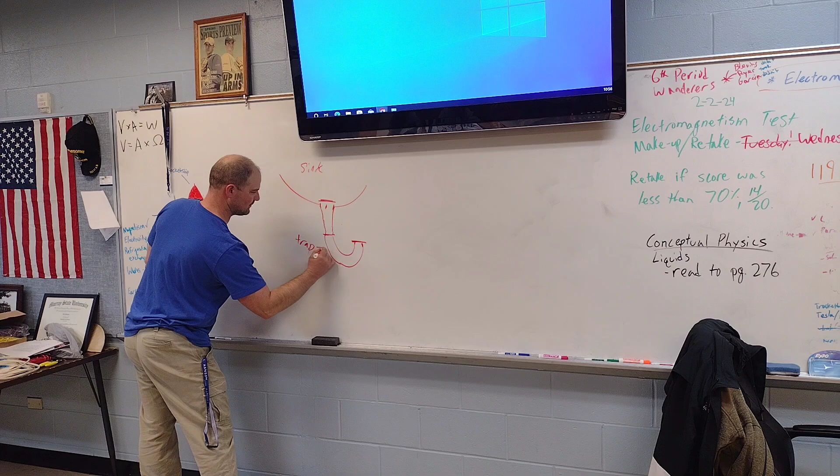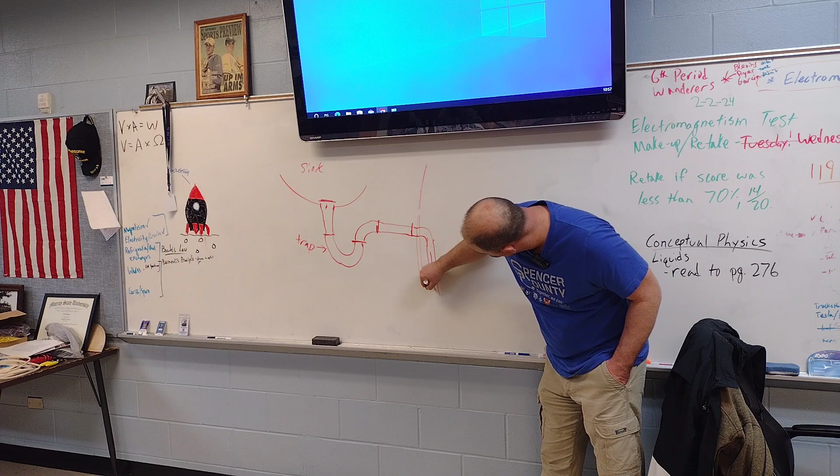A what? Oh, it's you. Yeah, it's the trap. No helping. So you've got a trap, it's called. Okay? That is a trap. And then out the other side, you've got another elbow. And that's going to feed into an extension. That goes into another pipe. That's got an elbow. That goes down inside, usually your wall, or it might be in the floor. And the water would head out to your sewer line. Or if you've got a septic system at home, it'd go to your septic, okay?

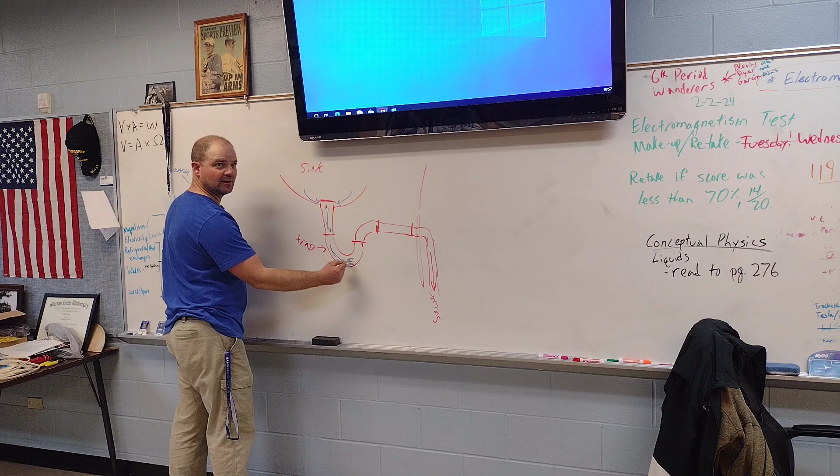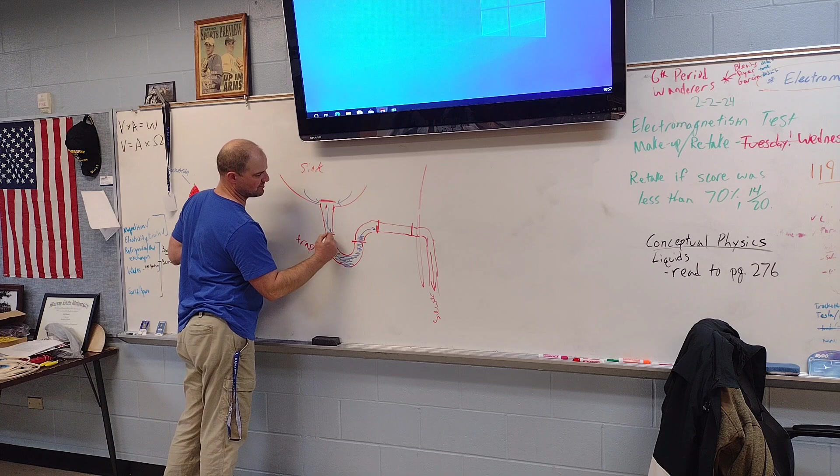Now, I'm going to switch colors to blue. So your water drains down, gravity pulls it down, and it's going to start to fill up the trap, okay? Once the level fills up to here, now it starts to spill out. Everybody see that? Osborne, you see that? Okay. So once it starts to spill out, it can go down to the septic. You stop draining water, the level would come back to be right about here. Everybody follow? Falling asleep, but following, okay?

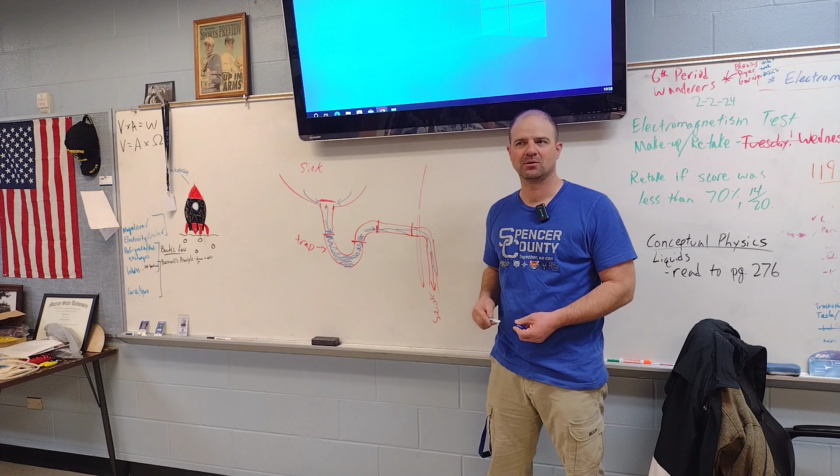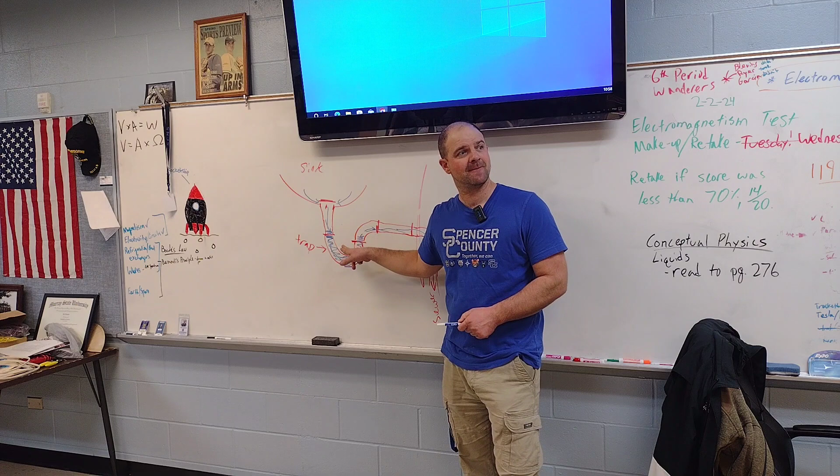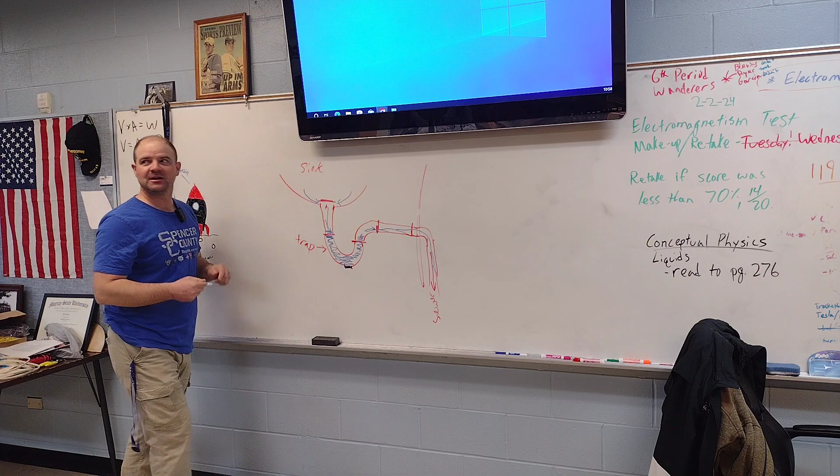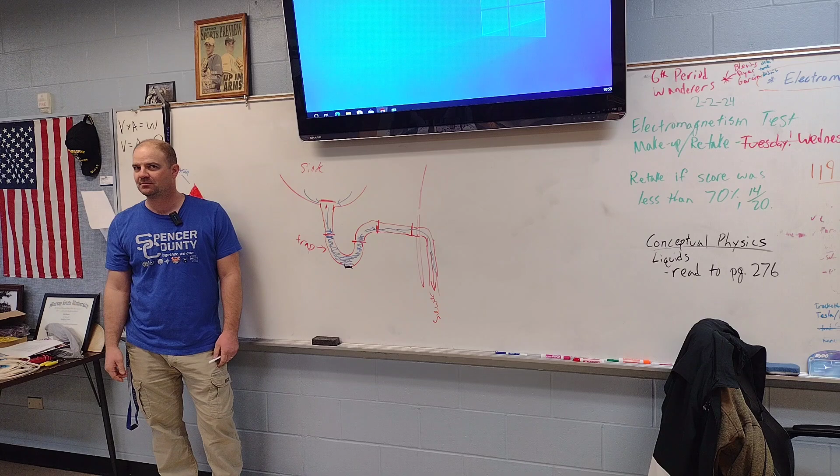Some of these traps, if they're glued in, you might have, let me switch colors again, what's called a clean out. So you'd have a little cap, a little plug that you can turn out, and what happens if you pull that plug? The water drains out, but why do you have a plug on the bottom of your trap? In case it gets clogged, okay.

Has anybody ever known someone that lost something down the drain? What did they lose down the drain? I lost the back of my earring. Your earring, the thing that retains it, the earring retainer. Okay, anybody else? I thought I saw another hand. What they lose? The cap, the toothpaste? Okay. How about the stone from a ring? There have been a lot of people through the ages that have lost, like, the prongs that hold the diamond in place get loose over time, and the diamond falls out while they're washing dishes or something.

And if the trap is glued in, you can take that clean out if you have one out, and bloop, it might fall right into your bucket. Because a diamond is dense, right? So it's not going to get flushed out real easy. So it'd stay there in the trap. So that's one good reason to have a trap. But that's actually not the primary purpose of having a trap. What? What does it say again?

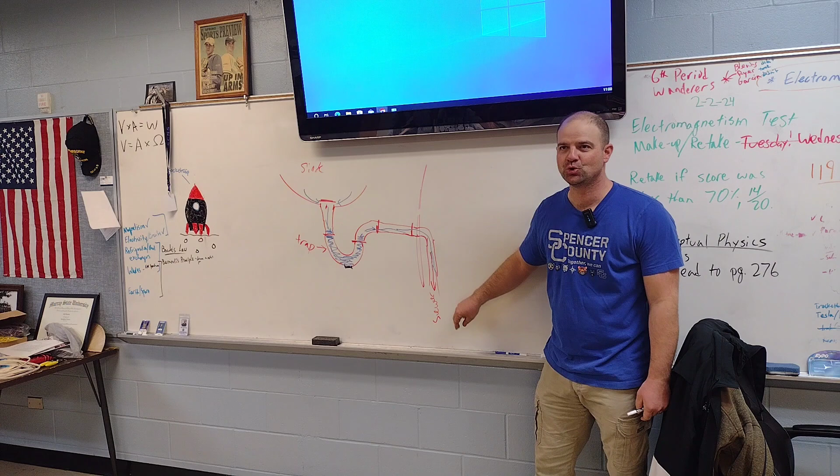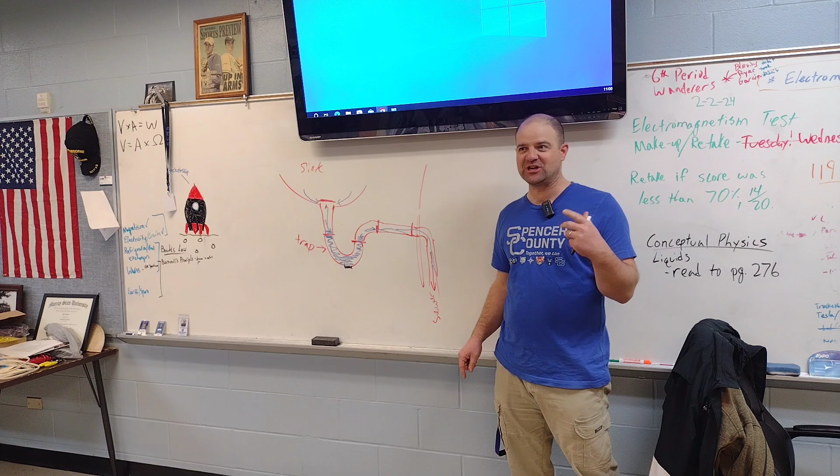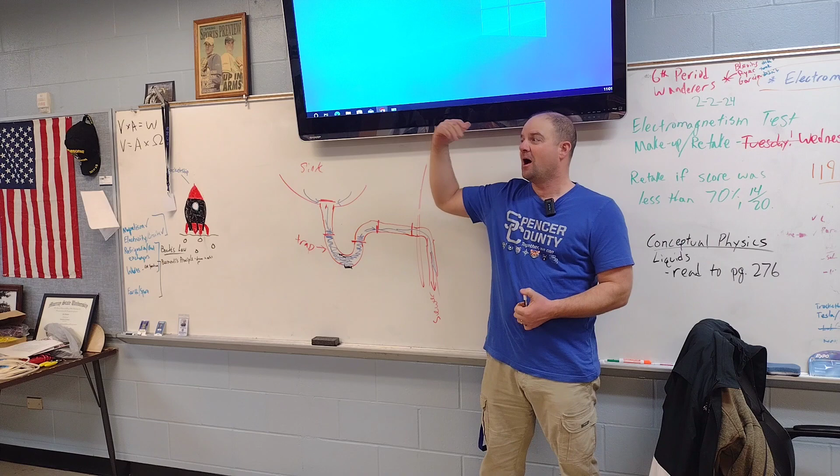Sewer. How does sewage smell? Okay, so what's to stop? Have you ever smelled sewage in your house? If you have, you might have had a dry trap. If you don't use a sink for a while, or a shower, tub, whatever, over time the water can evaporate low enough that the gas can get through. And now all of a sudden, especially when there's a good pressure differential, like a storm comes or whatever, you can have that gas pushed right up through your sink.

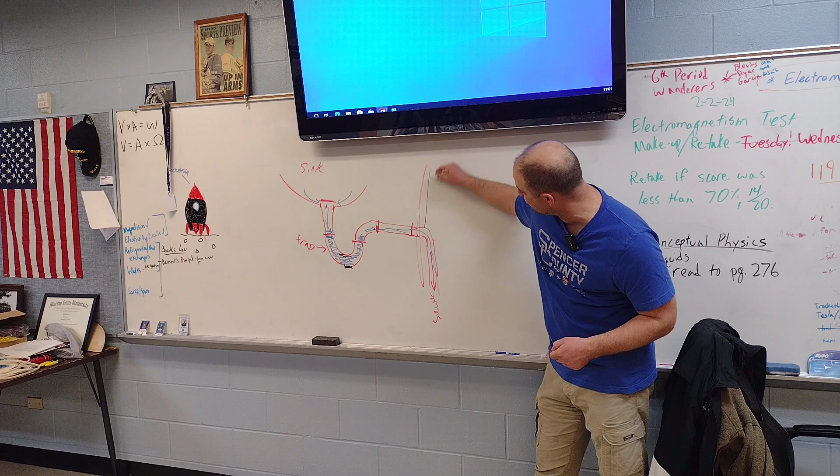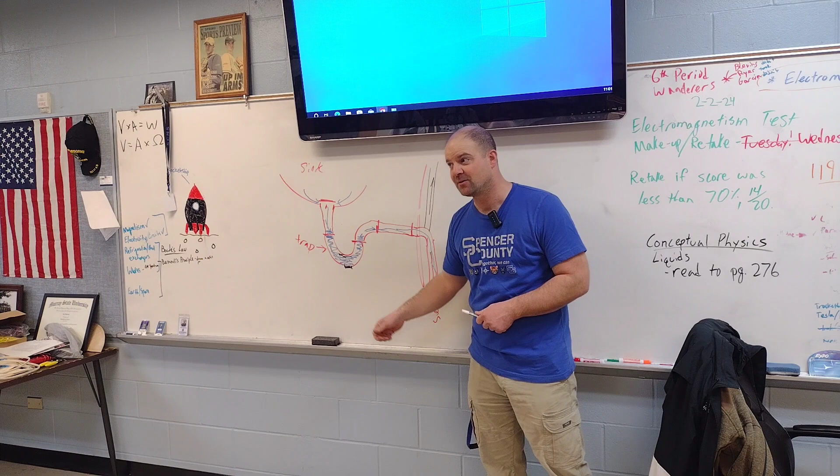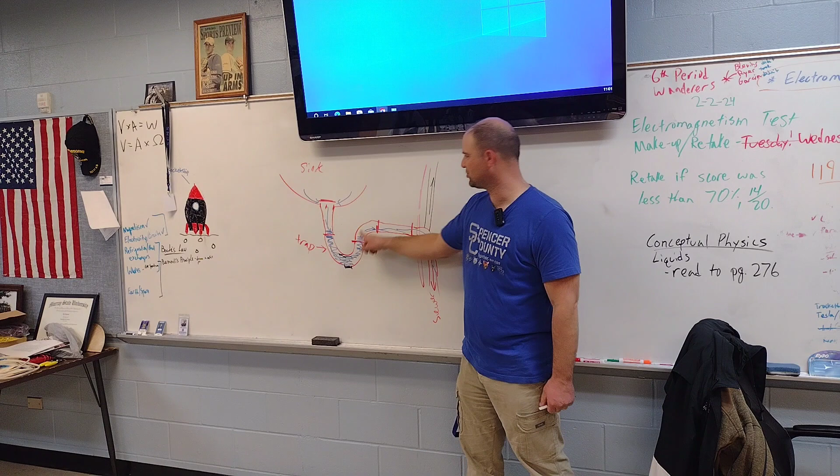Because you'll have a pipe that goes out the top. Yep. Yes, on most of them, you'd have a vent pipe. So the gas can escape this way, and it wouldn't be able to get through here because you've got water trapping. The water's not what's getting trapped, really. We want the water there to trap the gases back here. Does that make sense? So you're trapping the water, sure, but it's meant to trap the gases back. Okay, but that principle's still there, right? The more water you put in here, it just pushes out the other side with the same amount of force. But yeah, your sink.